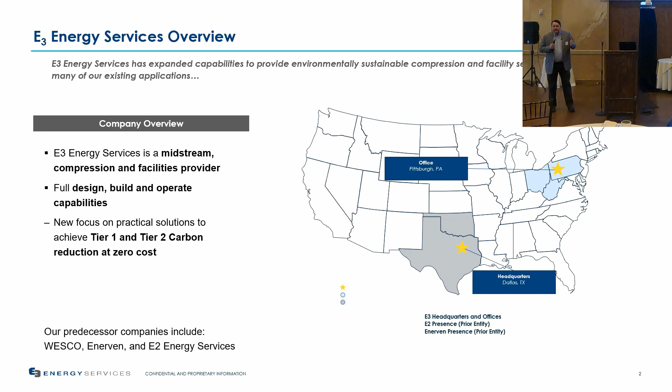Before I talk about E3 Energy, I thought I'd bring up what should be the number one question on everybody's mind. I'm surprised nobody has brought this up yet. Who is going to be the number 20th pick tonight? Now, for those of you who are football followers, and especially Steeler followers, whoever number 20 is going to be playing for the Steelers. And probably replacing Big Ben.

And just a side note, I was talking to my daughter the other day. She's a PGA professional, and she took a new job. She's in charge of the PGA Junior League system for the tri-state area, which is Ohio, Pennsylvania, and West Virginia, and also the mid-continent, which goes all the way over to DC. And I saw the roster of this area's PGA Junior League, and there's going to be a couple of mini Bens on the PGA Junior League roster. So that's kind of interesting, I thought.

So I'll tell you a little bit about E3, what we do. We are a midstream and compression services provider. We do build, own, and operate, where we own the equipment, build it, engineer it, design the whole system, and then we operate the midstream facilities. We also do compressor leasing and facility leasing, and we're based in Dallas, Texas, and we have primarily been involved in the Northeast here over about the last 12 years. Built a lot of things for Pine Run, Penn Energy, Antero, several companies. Eclipse was one of them that we did work for. So that's who E3 is.

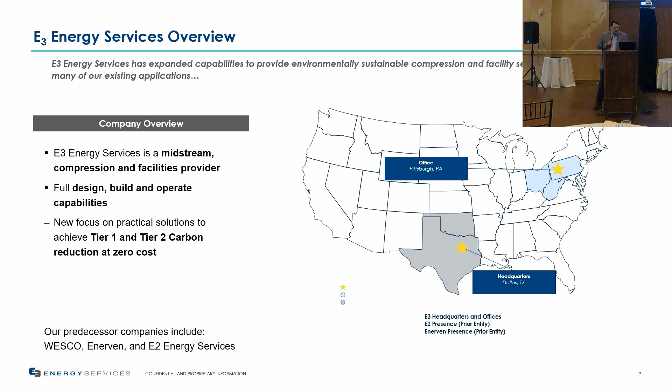And I want to talk. We're not moving. Let's see. There we go. I pushed the wrong button.

Okay. So I want to talk a little bit about what companies are doing to address their net zero carbon standards right now. A group of investors representing about $10.4 trillion set new standards for oil and gas companies. The reason they did that was because a lot of companies developed their own standards, and there were a lot of inconsistencies and no way to really judge how companies were doing. So these investors set new standards, which include short-term and long-term net zero targets, decarbonization strategies, capital allocation and disclosure and reporting, so that companies like ExxonMobil and Bechtel and EQT could all be ranked similarly.

And what's happened now is many companies are targeting to be at net zero by 2050, some even as early as 2030. So that means they're trying to reduce their carbon emissions. And the Greenhouse Gas Protocol has defined 3 scopes of emissions. Scope 1, which are direct emissions, produced by the company. Scope 2 are indirect emissions, and these come from things that they use or are generated in the purchase of energy. And then Scope 3 are indirect emissions that are not owned or controlled by the company.

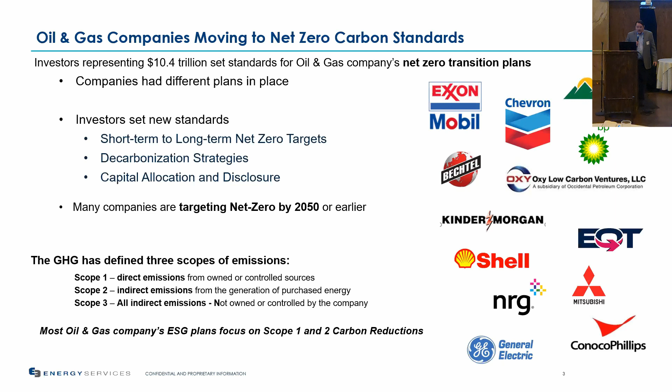So what is important about that is most companies are focusing right now on trying to reduce their Scope 1 and Scope 2 emissions, those they have direct control over and the ones that they have indirect control over, things they buy, use, things like that. So that's really where the focus is, and that's important to keep in mind as I move forward in the presentation.

Carbon capture, utilization, and storage. There's really two categories. There's CCS, which is carbon capture and storage, and there's CCUS, which is carbon capture, utilization, and storage. Now, the difference is you capture all this carbon emissions and you store it, you put it in the ground, you put it somewhere where it's no longer an environmental threat. And utilization revolves around, you've seen things on hydrogen, on trying to reduce carbon footprints.

Utilization might mean they're using it for an EOR application, or you're transporting it to a market that can use CO2. So those are two general classifications. And one of the ways you can get rid of carbon emissions is to put them in the ground. And you can put them in the ground for enhanced oil recovery, or you can put them in the ground permanently for sequestration.

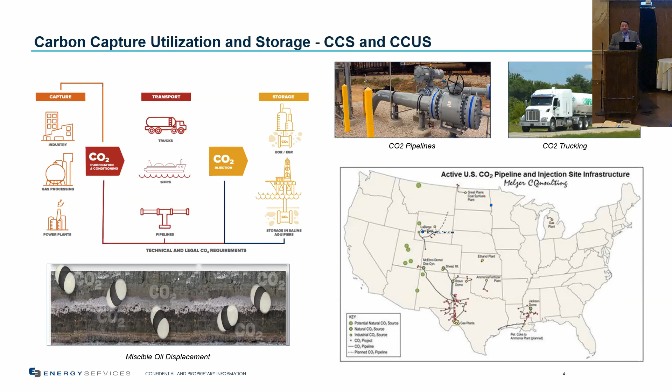One of the fellows here that gave the earlier presentation said there's some interest in EOR applications in Ohio, in the Akron area. Probably Clinton Oil, I'm assuming, is where that is. But there's not a lot been done. Well, you don't really have a source of CO2 up here for EOR applications. That's important because as we look at how to decarbonize our operations, we're going to be generating a lot of CO2 and we have to have a place for it. Where do we put it?

So the majority of the oil production in the United States is producing less than 15 barrels a day per well. You know, a few years ago, we almost called those stripper wells. I think 10 barrels a day was the limit for stripper wells. I'm not sure what it is now. So there's a lot of application in oil recovery to use CO2. And that's a place that we can put these emissions in the ground.

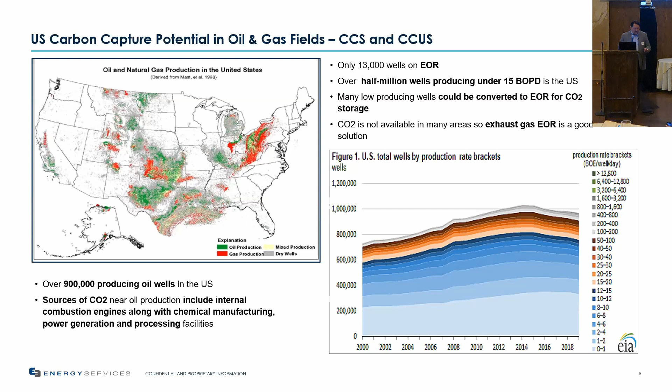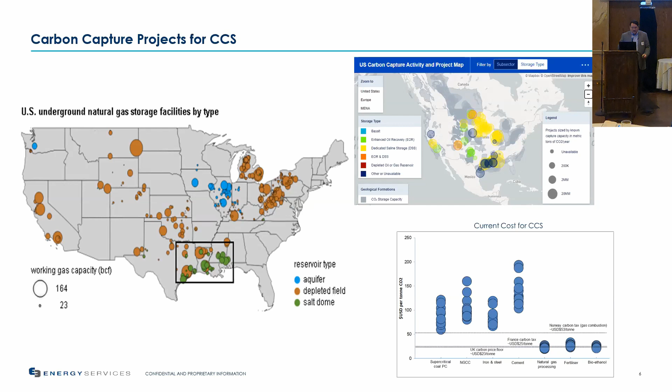Technology is in place that can be utilized to reduce these carbon emissions and the fugitive methane emissions. It's not something new that we have to invent or develop. This is already technology that's in place that can be utilized and applied by our industry to reduce the CO2 footprint. For fugitive methane, well, let me back up just a minute.

For decarbonizing compression, the most practical, common way to do that in the industry right now, what everybody's looking at doing, is electric conversions. Now, there's a lot of problems with electric conversions with natural gas compressors, especially at compressor stations. The other way to do this is exhaust capture.

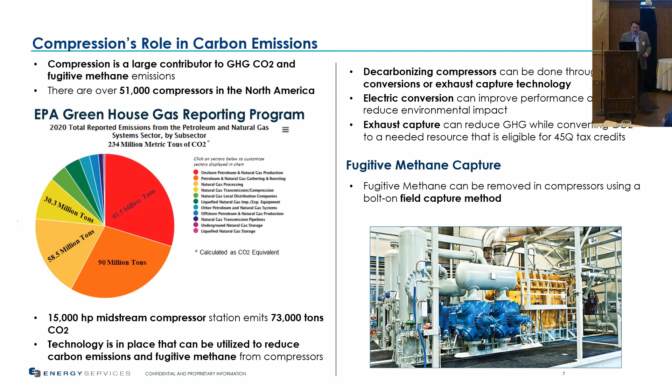So again, for decarbonizing compression, the most common method is to convert to electric. This only provides you with scope 1 emission reductions, not scope 2 or scope 3, only scope 1, because you're converting an existing internal combustion engine to an electric drive system. You do have lower maintenance costs. People say, well, electric compressors are much lower cost to operate.

We love electric compression. Well, when you look at the cost of the electricity and the fact that you get charged intermittently based on peak usage and non-peak usage, the cost to operate those compressors is much higher than it is to operate natural gas drive compressors. So that's a big factor.

The other factor is you have to get electricity to the site where you have compression. That's not always easy to do. It's not always fast and reliable to do from the utility companies. So that's another issue that you have to deal with. So bottom line is converting compression to electric drive is more expensive on the operator, and it only reduces scope 1 emissions. And right now, you get no tax credits in doing that.

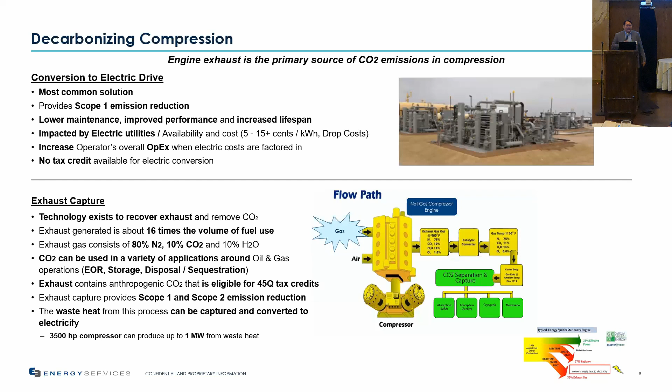So this is just a much more practical solution to our industry than trying to convert everything to electric. And when we start running all of our natural gas compressors on electricity, what are we doing to the power grid? We're putting a new strain on it, right? We haven't thought about that. It's great to have electric, but I think California had an issue on power, and they told people they couldn't charge their Teslas. They had to go on charging schedules to charge their cars. So the same thing can happen if we convert all of our compressors to electricity.

E3 has developed a new process to capture exhaust. This is a patented process. We just applied for a patent on this. And what we're doing is we're taking the exhaust from any source. In this case, this is a typical 15,000 horsepower compressor station. So we're capturing the exhaust, which you see in the purple, and we're moving that to a rotary separator, and we're taking the water out in the rotary separator.

Now, realize that exhaust is coming out at about 1,000 degrees. Remember, the exhaust contains nitrogen and CO2. So as we go further through this process, we can expand and contract the exhaust, and we get nitrogen out of that. That nitrogen is used to go back and cool the exhaust. So we're actually using the nitrogen that we're expanding and taking out of the exhaust to go back as a cooling loop to cool the exhaust when it comes in.

The CO2 itself, which you see with the little green arrow, I can't point to anything here, sorry, comes out at about minus 40 degrees. And that CO2 comes out as a liquid at as much as 3,000 psi. So now you've got CO2 extracted in this process, coming out at high pressure and in a liquid form. So now you can move that CO2, you can truck it, you can put it in a pipeline, you can inject it in the ground, you don't need a compressor to do that.

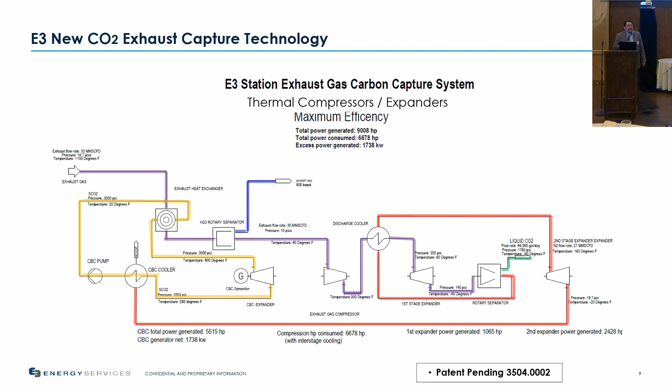Now, what's very interesting with this design is it fits on an 8-foot by 20-foot skid, about the size of a compressor. So this is new technology. We really developed it from a lot of existing technology, just reapplied some of it. But we think it's very useful as an opportunity and a process to decarbonize compression in the industry and other things besides compression.

Again, here's the small footprint. It used to be you would have to do this with an amine plant. You could do it with an amine plant right now and essentially get the same results. You might not generate electricity, but you could certainly process out the CO2, but you're going to need a much larger footprint to put an amine system out there to handle the volumes that we're talking about with this system.

And the nice thing about this, we're doing work with Southwest Research right now to test this operation and look at the purity of the CO2, but we think we're going to end up with about 99+% CO2 in this system, so it's a very pure CO2 end result from this process.

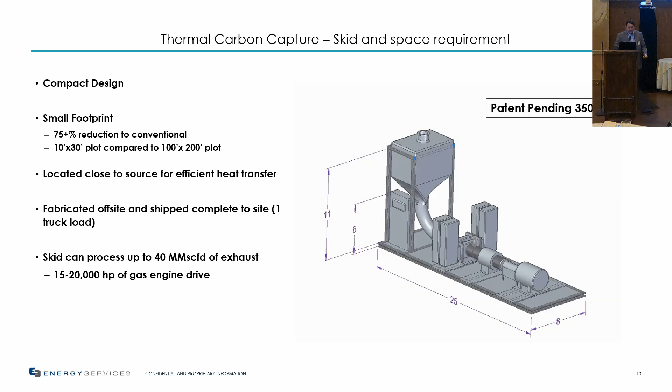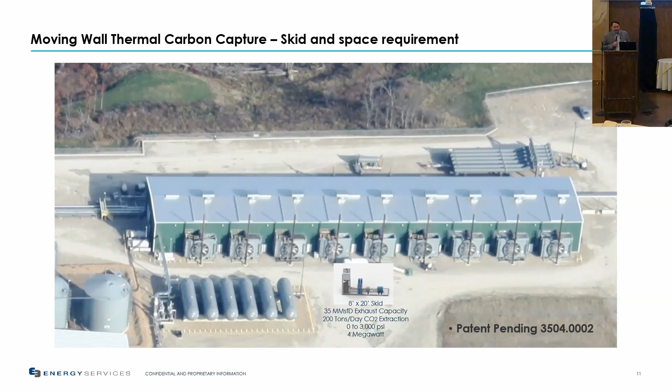I'll talk a little bit about the 45Q tax credit. And there's been a lot of evolution in the 45Q tax credit. In January 2021, some things changed. And one of the things that changed is the minimum requirement that makes you eligible for the tax credit. And now that's 25,000 metric tons a year.

So when you look at that process of the exhaust capture system that I showed you, the 15,000 horsepower compressor station system captures about 73,000 tons of CO2. That can also be used for turbines as well as reciprocating compressors. A Taurus 60 turbine compressor, the CO2 levels are lower in that than they are for internal combustion engines with reciprocating compressors, but it's going to generate roughly about 25 to 30,000 metric tons a year. So one Taurus compressor would still be applicable for 45Q tax credits.

And the 45Q tax credits right now are at $35 a ton for enhanced oil recovery applications. So if we inject that into oil wells for enhanced recovery, you get a $35 a ton tax credit. For sequestration, where we put it in the ground permanently for disposal, maybe we convert a storage field to disposal of CO2, you get $50 a ton per credit. And that $50 a ton equates to, if my memory's right, about $4.80 an MCF for that CO2.

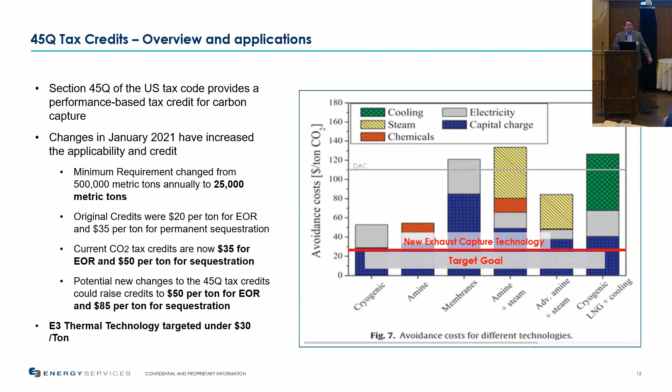Now, that's for a 15,000 horsepower reciprocating compressor type application. If you go to something that has lower CO2 volumes, those numbers go up a little bit. So they may go to $35 a ton, maybe as high as $40 a ton, but you're still getting a minimum of a $35 a ton tax credit to remove that CO2 in an EOR application. So we think this has a lot of application in the Northeast for sure, because EOR hasn't been actively used here because there really hasn't been a good, cheap source of CO2, and it hasn't been economical.

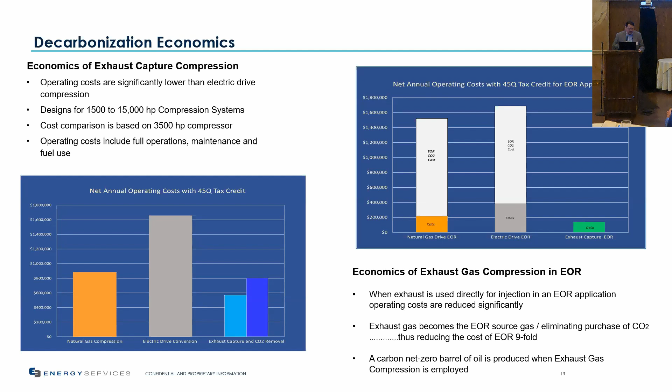So just in review, I'll finish up here and then we can have some questions. Interest in decarbonization obviously is growing with many oil and gas companies. Electric drive retrofits are great, but they only reduce Scope 1 emissions. They require capital support to replace engines, and they increase operating costs when you factor in electricity.

The electric installation and operating costs are high, and they vary based on usage. So you don't necessarily have a fixed electric cost if your usage varies. And there's no tax credits currently available for electric conversions. Exhaust capture, we think, is a very effective and economic, practical solution to decarbonize compression and other systems. The exhaust can be applied in many applications for CCS and CCUS.

And the CO2 from exhaust can be separated and transported and it can be used in different markets, or it can be injected underground for EOR or sequestration. Exhaust capture compression reduces both Scope 1 and Scope 2 emissions, and it qualifies for 45Q tax credits.

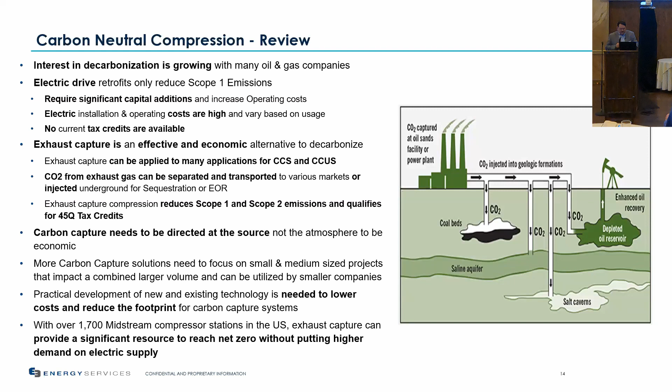With over 1,700 midstream compressor stations in the U.S. right now, exhaust capture can provide a significant resource to reach net zero without putting higher demand on our electric supply. And that's something that we really have to take into account. And that's all I have.

Any questions? Any systems installed or pilot projects yet? We are working with one independent in North Dakota to do an EOR application with exhaust capture gas from a compressor. And we're talking to several people in this area about larger compressor stations.

Yeah, it's really a bolt-on application, so I don't want to say it's easy to do, but it's certainly repeatable and not difficult. Anything else?